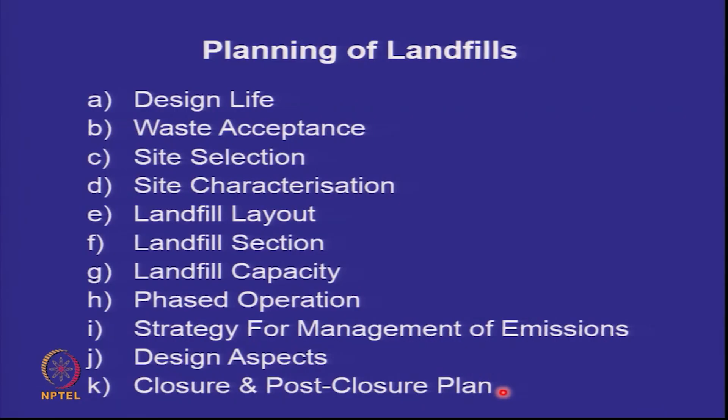what are the design aspects that we have to look into, and what is the closure and post-closure plan. That means when we walk off a landfill, how do we deal with it. Let's quickly recap very briefly what we did last time.

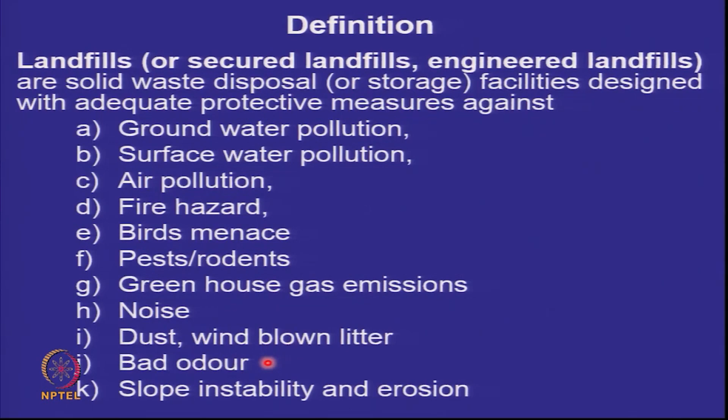We talked about landfills being solid waste disposal facilities designed with adequate protective measures against all this: groundwater pollution, surface water pollution, air pollution, fire, birds' menace, pests, rodents, greenhouse gases, noise, dust, litter, bad odor, slope instability, and erosion.

And we talked about basically three types of landfills adjacent to a city: hazardous waste landfills for industrial waste, non-hazardous waste landfills for municipal solid waste, inert waste landfills for construction and demolition waste. In addition, we said if we have thermal power plants or mine tailings nearby, then we will have monofills for these high volume wastes, and special landfills are designed for highly toxic

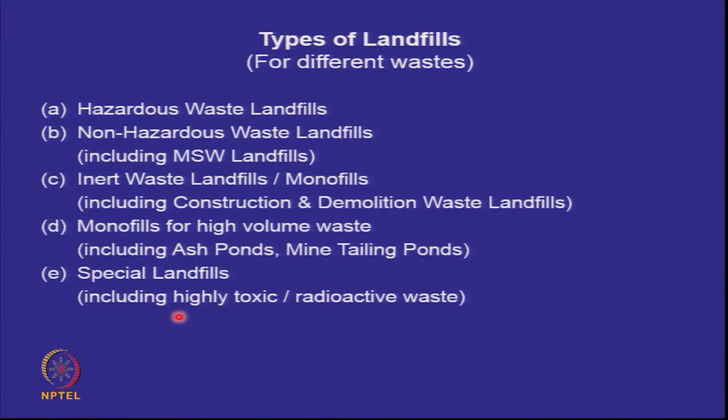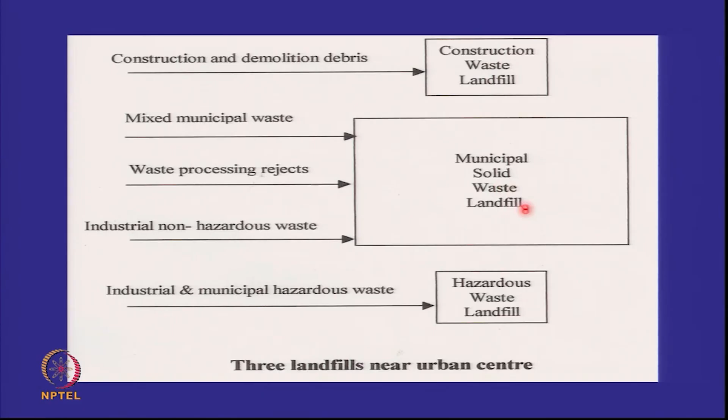and radioactive wastes. We also said that a city could have three separate landfills: one for construction and demolition, one for municipal solid waste, and one for hazardous waste. And we said all of them could be in one location together. That means the largest part would be the mixed municipal waste, but construction waste and hazardous waste could also be in that area.

Now, the advantage of this is if you put them in one place, then the infrastructure facilities required are only one. For example, you will have an entrance and a weighbridge. If these are in three separate locations, for each location you will have to have a weighbridge. For each location you will have to have an environmental monitoring facility. Whereas if all three are together, the infrastructural overheads are much minimized. However, it will depend on the distances involved.

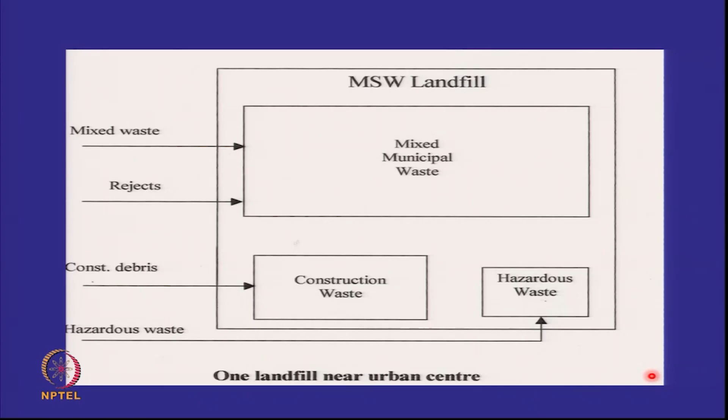If you are a large municipality or a mega city and your transportation costs are very high, then you may not put them in one place, you may put them in three separate places. But I would like you to see what's happening now. So if I look at a huge facility that we create, the mixed municipal solid waste is here, the construction and demolition waste is here, the hazardous waste is here. So these three components is what we saw in the last slide.

But what do we have more at this site? We have a temporary storage. That means if the waste is not going into a landfill, it has to be pre-processed, or if it is monsoon and it cannot be placed, you have a temporary storage facility. You have a pre-processing unit, that is what will go where. Will all the waste go directly here, or will some of it come here after pre-processing?

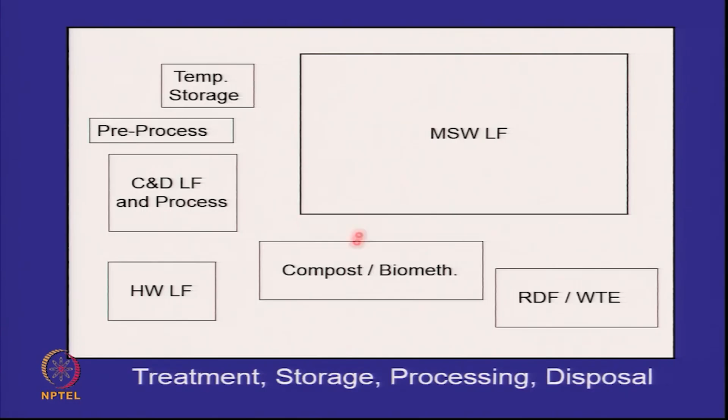And in addition, you may have a composting or a biomethanization plant, and you may have a RDF and a waste to energy plant on the same site. So as the importance of processing and the investments in processing increase, this will become smaller and smaller, because this is now no longer the original municipal solid waste. This is the rejects from everything. It is the rejects from here, the rejects from here, and all that which could not go. So the pre-processing will send some material. So this will become smaller with time, and these will become bigger with time.

So just to recall the landfilling philosophy, which we had done last time, only that waste should be placed which has no recoverable component. Landfills will be designed like dry tombs, no water in, no water out, and not like bioreactors. And the design life will be typically 50 to 75 years, beyond which the containment barriers may have to be re-examined, and we may have to excavate the waste and reconstruct it if the waste is not stable.

If the waste is stable, it can be homogenized with the ecosystem. So if the waste stabilizes, then the waste disposal is final. If the waste does not stabilize in 50 to 75 years, then the waste disposal is temporary storage.

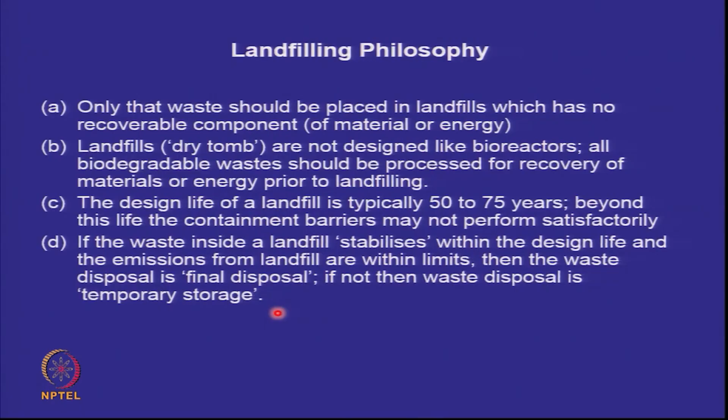So last time we said, is there any other way of doing this, or is this the only way of doing it? So I asked you to read up about bioreactor landfills. So would you like to tell me what you found out? What is the main difference between a dry tomb landfill and a bioreactor landfill?

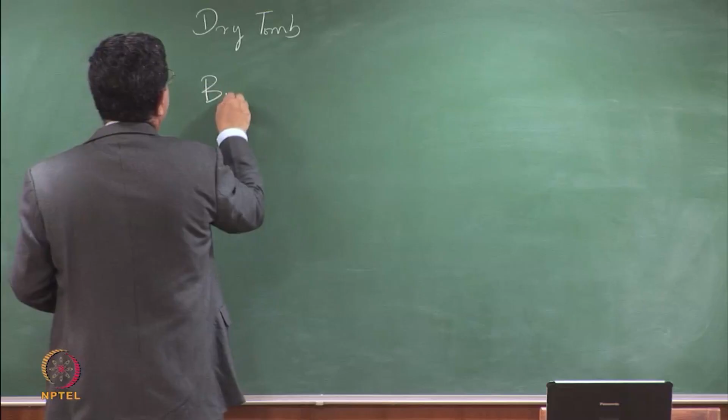So it's being said that in bioreactor landfills you are recirculating the leachate. And is that all? So there are 4 types. Let's put them. So I've talked about dry tomb, and you're talking of bioreactors. Incidentally, I can recirculate the leachate in a dry tomb also. That's just one of the leachate management strategies that you have.

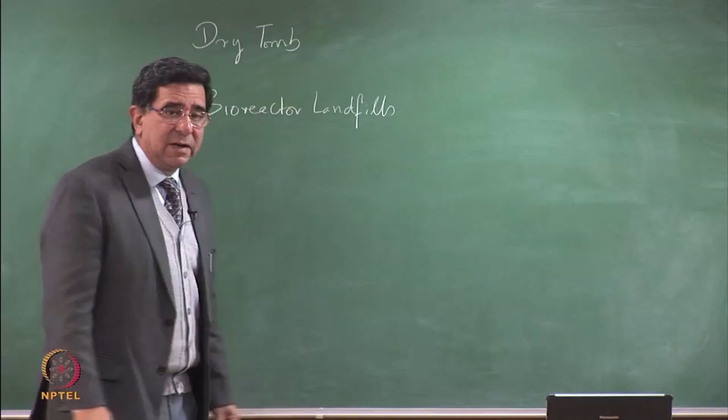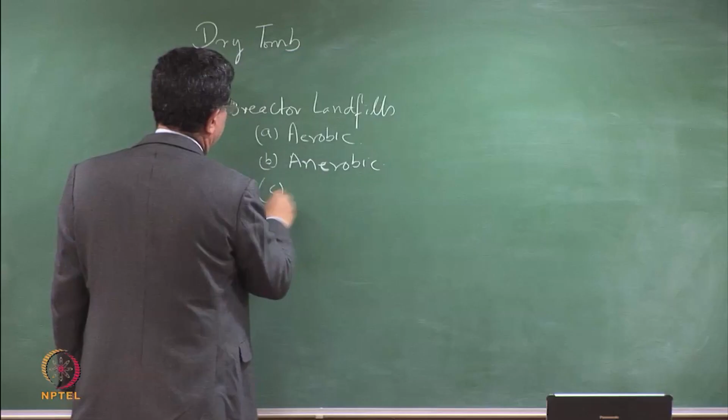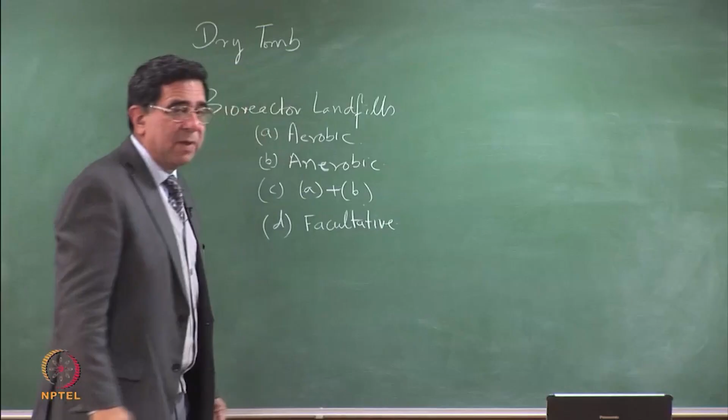So in bioreactor landfills, you said there are 4 types of bioreactor landfills. Okay, just tell me. Aerobic, anaerobic. Both aerobic and anaerobic. Facultative. Pardon? Facultative. So you have to remember that the basic concept of a bioreactor landfill is that the waste which is coming in has got significant biodegradables. What we are saying is that all the biodegradables should go to a composting plant or a biomethanization plant.

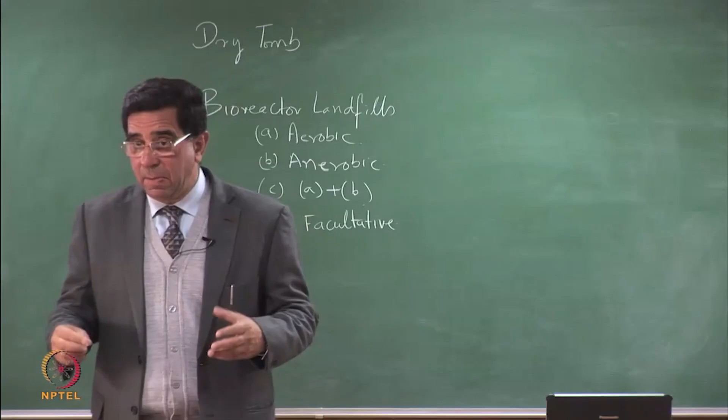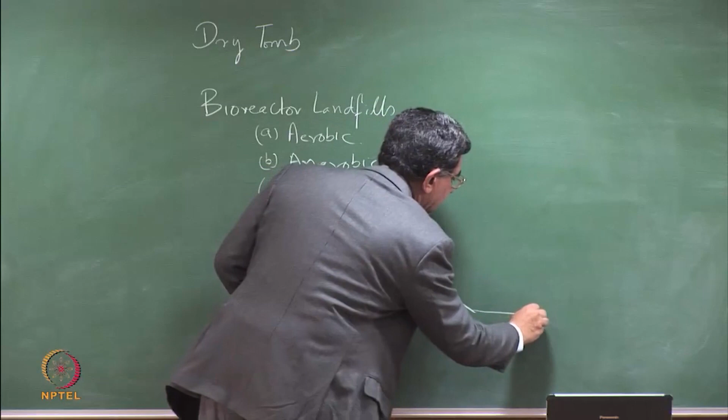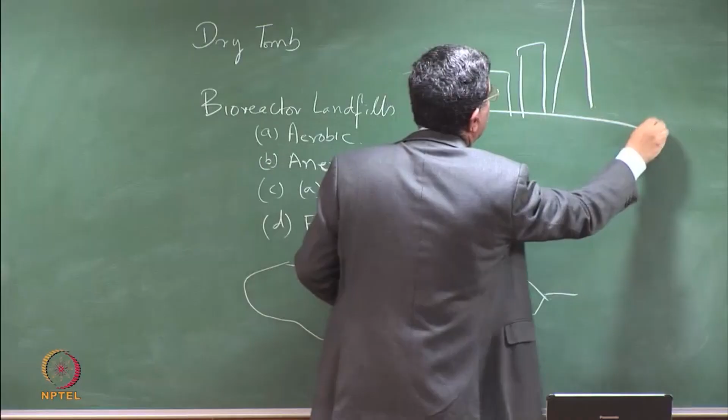So let us compare. This is a bioreactor landfill, right? Which, let us say, looks something like that. And this is a factory or a closed industrial building where the waste comes in for other purposes like biomethanization. So the bioreactor landfill is an open area bioreactor. Whereas if you do containerized biomethanization or containerized composting, anaerobic or aerobic, then you have everything in a controlled environment. So there are 2 differences, controlled and uncontrolled, right?

And I talked to you about composting last time. Windrow composting is aerobic. In how much time does the waste stabilize? Do you remember that I had said that you can make these long windrows, you can turn them over every day. Well, I said in weeks, the waste will stabilize in weeks, right? And remember, windrow composting is also open, and so they should put it under a shed. It's not containerized composting. So containerized composting is more expensive. Windrow composting is less expensive but gives more odor. But in any case, we are talking here of stabilization of the waste in weeks.

Suppose some biodegradable waste comes into a conventional dry tomb landfill. How much time do you think it stabilizes in? Weeks, months, years, tens of years. Well, tens of years. I can assure you that in a dry tomb landfill in which water is not coming in, you don't have enough moisture to degrade. So in a dry tomb landfill, the waste stabilizes in tens of years. Therefore, biodegradables should not come in. Well, if you make a bioreactor landfill, in how much time does it stabilize? Yeah, so it goes from tens of years to years. It doesn't go from tens of years to weeks. So I'm just giving you 2-3 alternative comparisons.

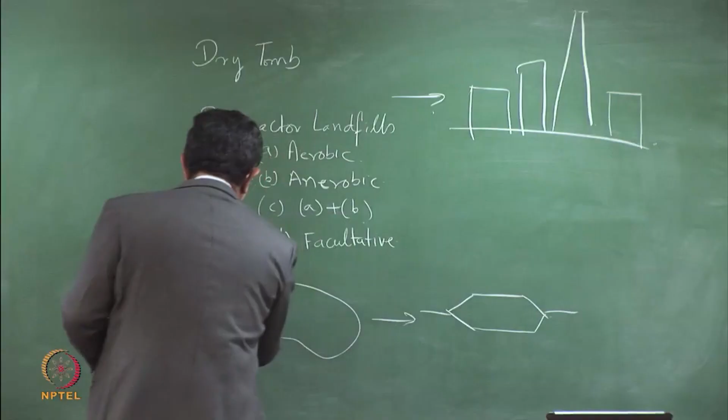One, in a closed container facility like this, the waste coming in, we have more control. We have control over temperature, humidity, pH, and oxygen. In a facility like this, we can attempt to do control, but it's not that closely possible. There is rainfall, it's in kind of an open air facility. Therefore, the dry tomb philosophy presupposes that everything will go to dedicated facilities which are geared for stabilizing the waste in a particular way. Whereas the bioreactor landfill is just a faster way of stabilizing the biodegradables in a dry tomb landfill.

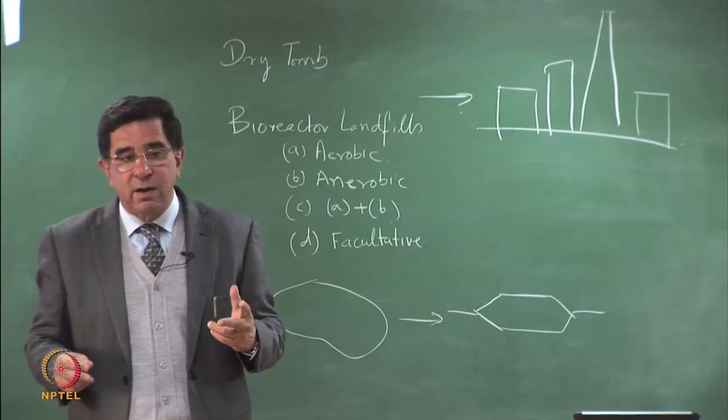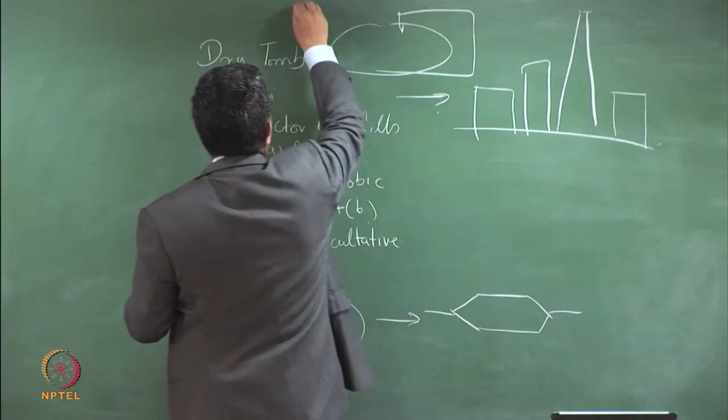So I can recirculate the leachate or I can send in air. So the two variables which you are really controlling are sending in water and sending in air. So if I have a dry tomb landfill and I take out the leachate and recirculate it, or get fresh water and recirculate it, and if I get air and recirculate it, then it becomes like a bioreactor landfill. However, control is difficult. Sometimes people have tried to accelerate these processes by putting in some accelerators, and the process can go out of control. You may have a lot of heat, you may not be able to control all the conditions. You can control humidity in a container, but you may not be able to control humidity in a landfill.

So bioreactor landfills are good when the waste is so intimately mixed that the biodegradables cannot be easily separated from the other components. Then you might want to send this to a bioreactor landfill. However, if you are doing separate storage at source, or even if not, but you can do pre-sorting, send bulk of the material to a composting plant or a biomethanization plant or a gasification plant, because they are more dedicated and they stabilize the waste faster.

So that's the concept. In some countries bioreactor landfills have come up, but not in a very big way. We still try to use them as an accelerated, stabilized landfill. But remember, you are dealing with much larger quantities of leachate, and there are associated risks - larger possibilities of leakage and instability of slopes if the pore water pressure inside the waste goes up. So these have to be traded one off the other. At the moment, India is following the dry tomb philosophy, but it is open to new developments from time to time.

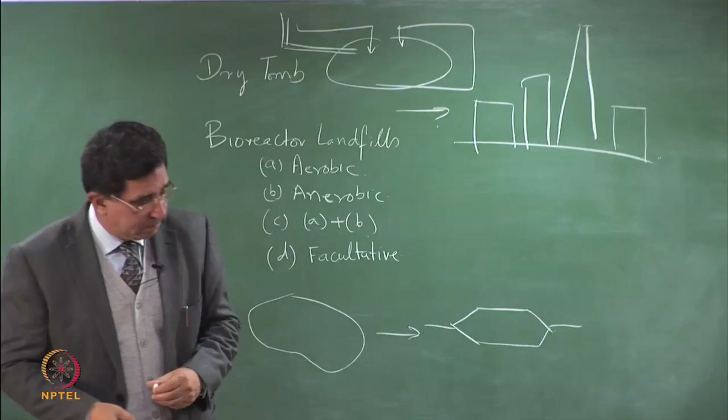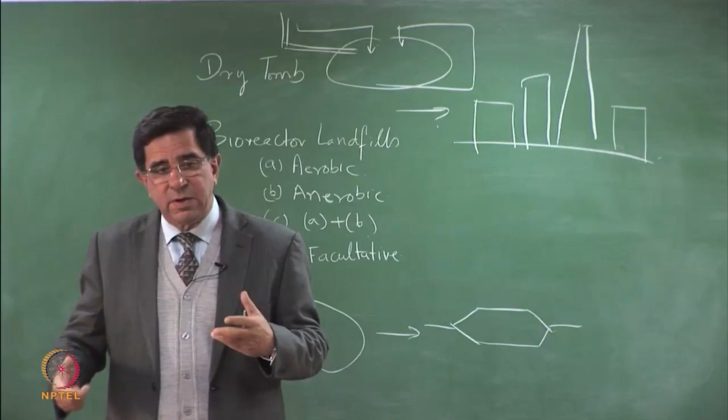Any question you would have on this? Since you studied bioreactor landfills, if you feel it's still better, you've got to weigh the various alternatives that we have.

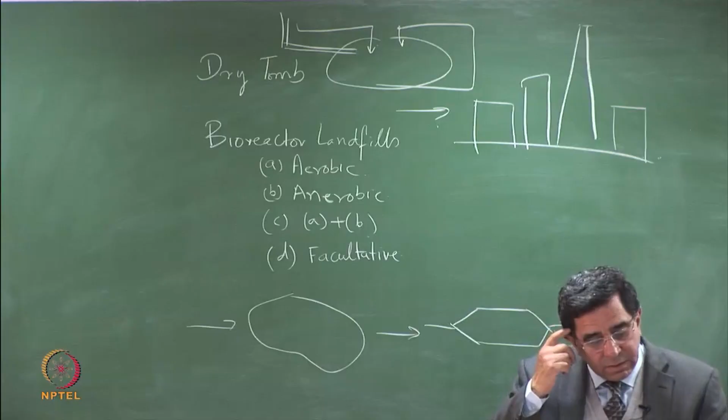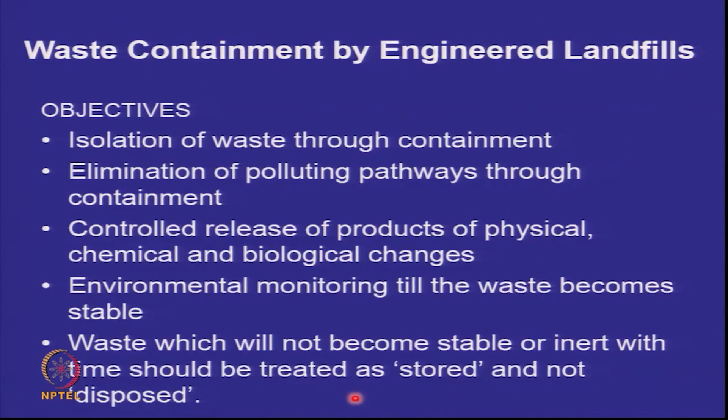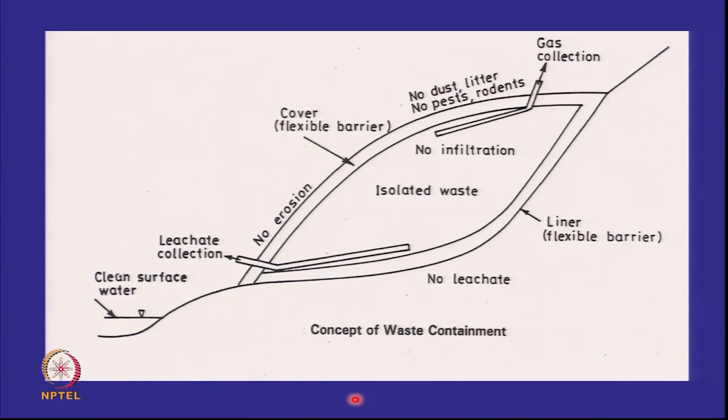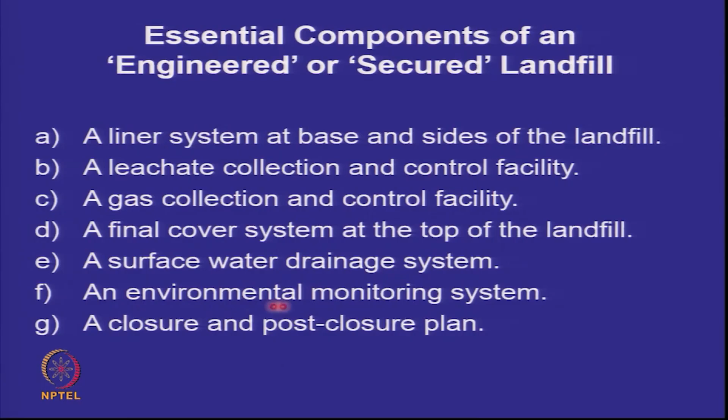And we said that if you have these 7 components - a liner system, a leachate collection system, a gas collection system, a final cover, a surface water drainage system, an environmental monitoring system, and a closure and post-closure plan - you have an engineered, secured, or scientific landfill.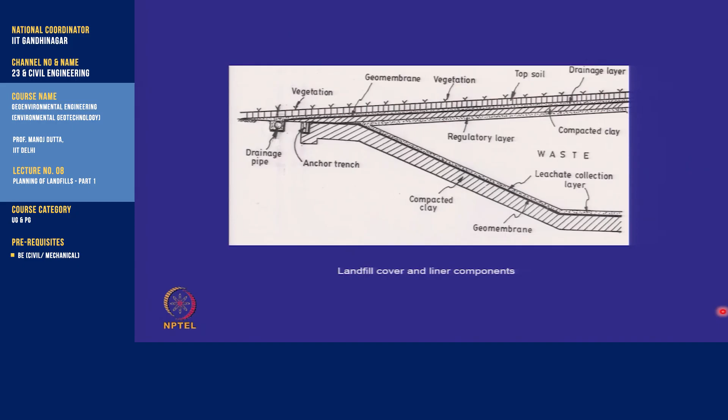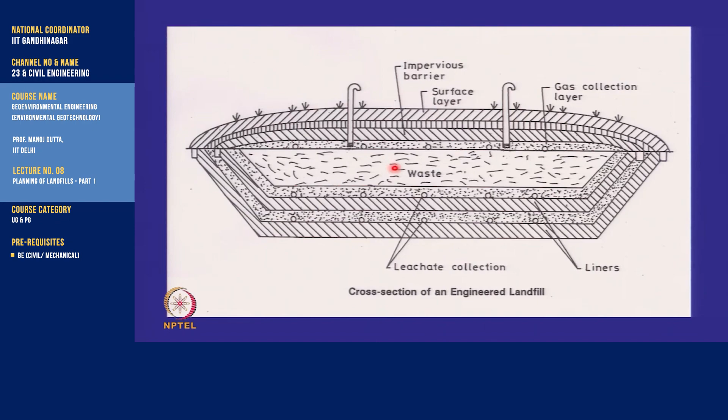And this is what it looks like in its true component form. If you look at an exaggerated view of the cover and the liner here - of course this waste is actually several meters or tens of meters high, and these are only a meter or two, but this is an exaggerated view to show it has many components. The covers and the liner are multi-component systems.

So the first question is, what is the design life of a landfill? Just to address this issue, the design life of a building is 75 to 100 years. So the larger I make the design life of a landfill, the more area I need. If you want a 100-year landfill, you have to calculate the waste that will come out, what percentage of the waste will reach the landfill, and you'll come up with a huge area. So typically, a landfill can be designed for the same design life as a building.

However, often that much area will not be available. If that much area is not available, what is the correct idea of the size of a landfill? The design life of a landfill is the active period when the waste is being filled, plus the closure and post-closure period. After you have filled the waste and are no longer putting waste on the site, the site is not closed, because the whole thing is still undergoing chemical reactions. So you have two periods - the filling period and the closure and post-closure period - for which you have to take very intense care of the site.

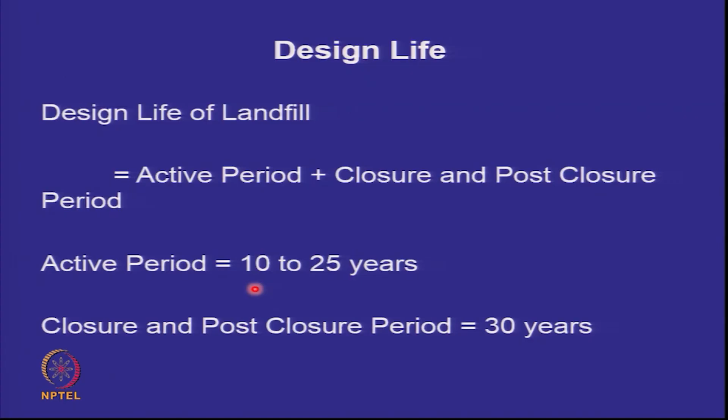Now, can the active period be smaller? You might say, I've got a very small piece of land, can I design a landfill for 3 years? Well, sure, you can design it, but it's very expensive. The smaller a landfill becomes, all the facilities have to remain the same - you still have to have an entrance gate, a weighbridge for the waste coming in, fencing, monitoring wells and air monitors. So all those expenditures are fixed. You might say I'll go off the site in 3 years, but you still have to monitor that site, if doing an engineering design, for the full time till the waste becomes stable. So typically, a site with less than 10 years active period is uneconomical or unviable. It's better to have sites with an active period of 10 to 25 years.

Remember, depending on the type of landfill, you will have acceptance criteria. You can't go and dump any waste on any landfill. Only authorized waste will be accepted, and no liquid waste or slurry type waste will be accepted at a landfill. You can have thick viscous sludge which will not move on its own. Slurry type waste means lean slurry, that means a lot of water. If you have a slurry type waste which is a lot of water, you have to dewater it and bring it to a form where it will not move. So authorized waste only, no liquid or slurry type waste can come into landfills.

Landfills are not designed like ponds. No recyclable and no compostable waste should come to the landfill. Only that which is so intimately mixed that none of the plants are going to accept it should come. No waste from which energy or material recovery is feasible through thermal, biological, or any other process should come to the landfill.

If you are having hazardous waste landfills, you get waste from different industries, and fires and explosions at hazardous waste landfills are not unheard of. So if you have incompatible waste, one which will ignite the other or cause a reaction, then you have to store them separately in separate landfill units.

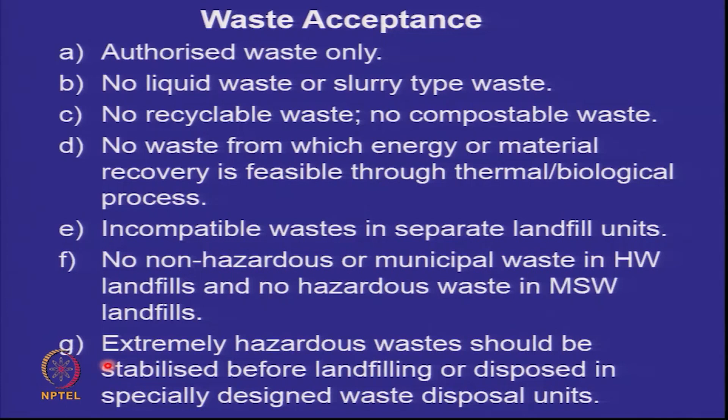There are two ways to handle this. One is that you can stabilize it and then landfill it, or you have to go for a specially designed waste disposal facility. Suppose I have a hazardous waste X. How do I stabilize it? I can encapsulate it, I can put it in a lead container - I am just giving you examples. And then this encapsulated waste can be placed in a landfill which permits it.

However, if it is nuclear waste, you can't even do that. If you have very hazardous waste, then all countries are expected to have a very hazardous waste disposal site which is deep underground in the rock, and that's where the waste should go. So it's like one country may have one or two such sites, whereas for municipal solid waste landfill, every municipality will have to have one. Hazardous waste landfill, not every municipality.

Those which are big industrial areas will have hazardous waste landfills, and they will in fact receive the hazardous waste from the areas around it. It becomes like a regional landfill. So typically a state may have 2, 3 or more hazardous waste sites. Gujarat is very industrialized, it has many hazardous waste landfills, whereas Punjab and Haryana may have only 1 or 2, but all big towns will have a municipal solid waste landfill.

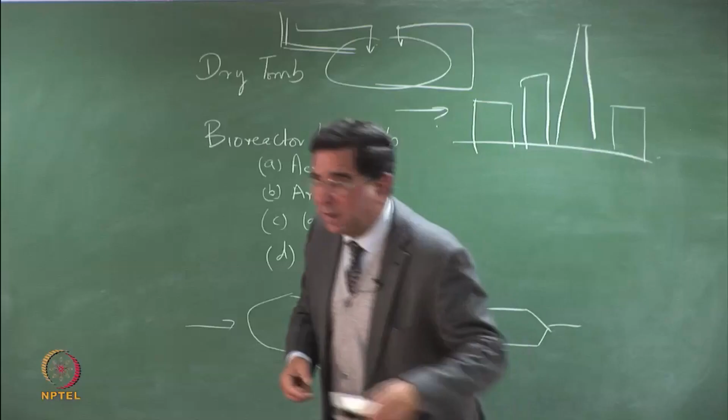We have to select a site with greatest protection to the environment at low cost and with public acceptance. The most difficult problem is with public acceptance. Nobody wants to have waste in their backyard. And what is that called? NIMBY - not in my backyard. You can send the waste anywhere else, but don't send the waste to my backyard.

So the biggest thing we have to overcome, and everybody is now very enlightened, is NIMBY. The villagers are enlightened. They say don't send the waste of the city to our village or near our village. Why should you? You live in your own waste, you are generating the waste. So typically this is a big problem now in the country.

However, the solution to this is always either barren land or already degraded land. That means land where waste has been traditionally disposed of in the past, maybe not in a proper manner. But once waste is already being disposed there, and you tell people, no, now we are going to do it in a more engineered manner, it will look green after, and you show them other landfills, then they say, oh, this is good.

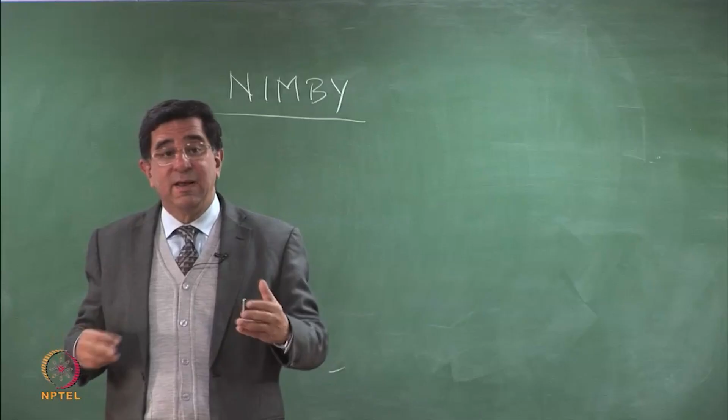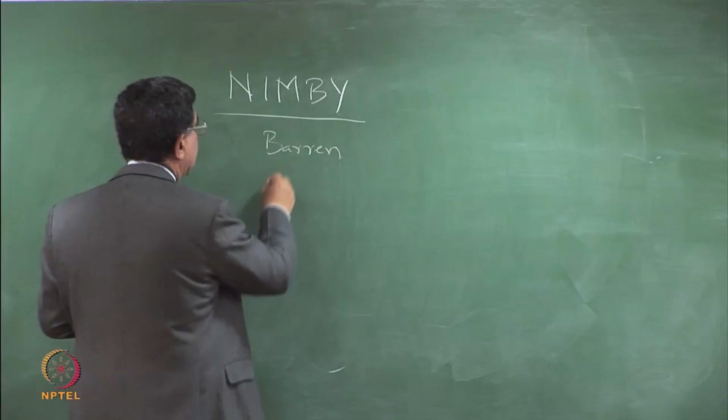But if you go to a new site, a greenfield site, then you have a problem. So typically, when doing site selection, look for barren land, away from habitation, and look for degraded land. The simplest or the highest priority is land which has already been used in the past for dumping all kinds of industrial waste or municipal waste.

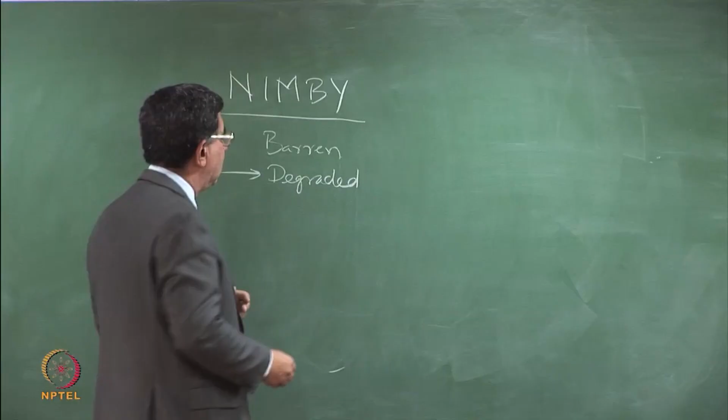So suppose you have a bunch of sites, say 2 or 3, then also you have to still come up with the best site. For that you have to do a site selection methodology where you have to balance multiple parameters. We are talking of protection of environment, low cost, and we have to consider some attributes which you can see we are talking about.

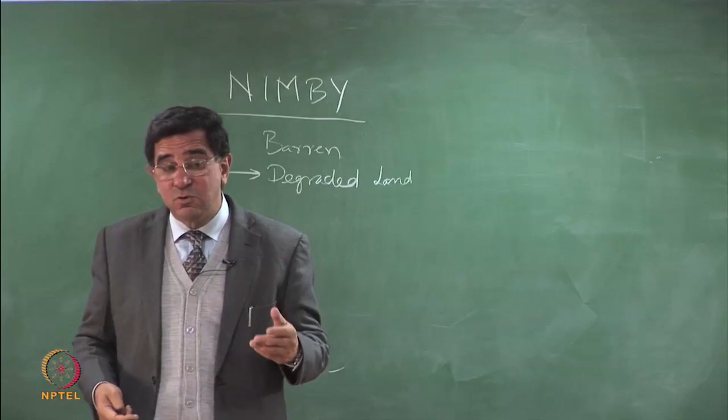Let us say I have 2 sites. In one place the groundwater table is 2 meters below the soil, in another place the groundwater table is 20 meters below the soil. So the immediate bell which rings is that the 2 meter site, where the groundwater table is 2 meters below the ground, should be avoided, because if there is any leakage, groundwater will become immediately contaminated. And if it's 2 or 3 meters and it's drinking water, there will already be hand pumps in that area, so people will be using it all the time.

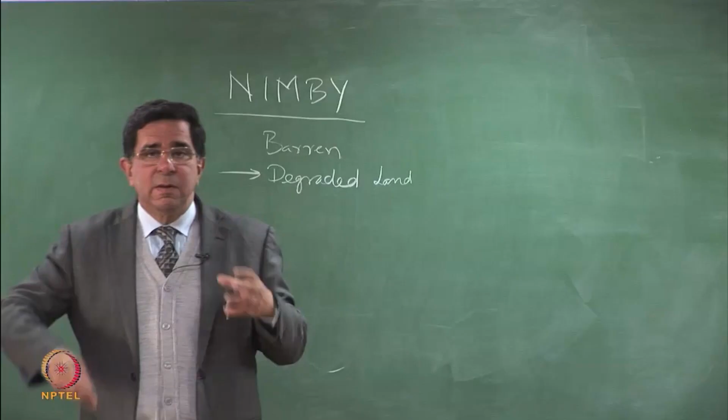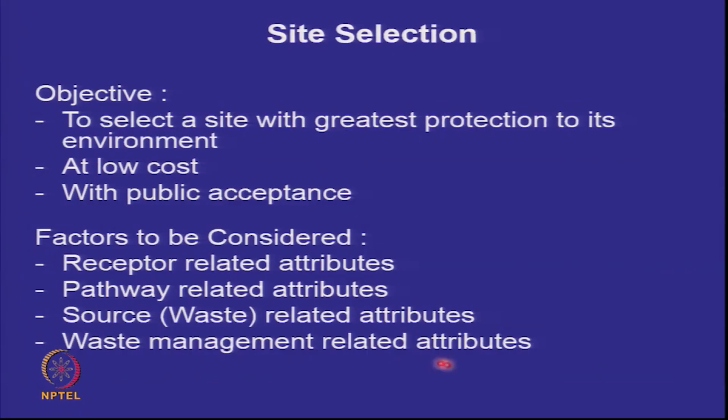So such parameters - receptor related parameters, how many people are adjacent to that site; pathway related parameters, where is the groundwater table, where are the drinking wells, where is the river; source related parameters, are you having a large waste dump or a small waste dump; and waste management attributes - these are the 4 sets of attributes which have to be considered. Decision making is not simple. It has to be a multi-parameter approach, so potential sites are identified and site selection criteria is drawn up.

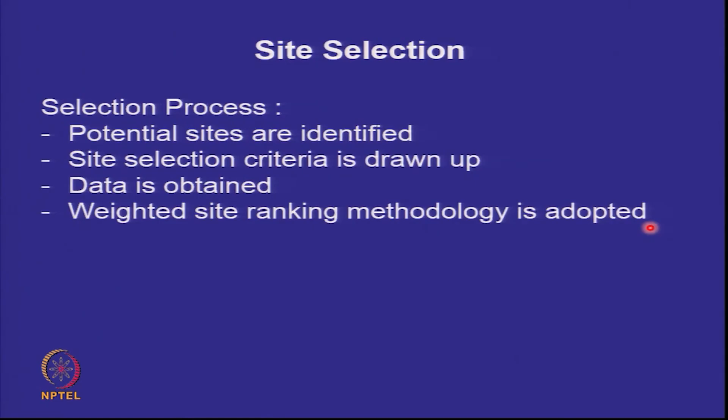A weighted site ranking methodology is adopted. The Central Pollution Control Board has one weighted site ranking methodology. There are more site ranking methodologies available in literature. We will do the weighted site ranking methodology in a later lecture. So we identify the sites. If there is only one site available, the choice is hardly there.

You have to set up criteria - what is important to you and the people - and obtain the data. You can't make decisions in the absence of data. What is the type of soil? Is it pervious sand or is it impervious clay? So some decisions are fairly obvious, and then you adopt this.

But for us, broad locational criteria is already there as to the minimum distances from critical facilities. So when you have a landfill which has to be located at a site, you will check all these. It should be at least 200 meters away from a lake or a pond, more than 100 meters away from a river. If it's in a floodplain, that means that area gets flooded, then you have to make a protective embankment all around it, because you can't have your landfill being submerged and unsubmerged - the whole thing getting filled with water while it's operating.

You have to be 500 meters away from a highway, 500 meters away from a residential colony, 500 meters away from a public park. You cannot be inside a critical habitat, inside a wetland, or inside the coastal regulation zone. Because of bird hits, you should be 3 to 20 kilometers away from an airport. I think the Indian regulations are much more stringent - they are talking of being 20 kilometers away. You should be 500 meters away from the nearest water supply tube well. The groundwater table level should be at least 2 meters below the base, and other factors.

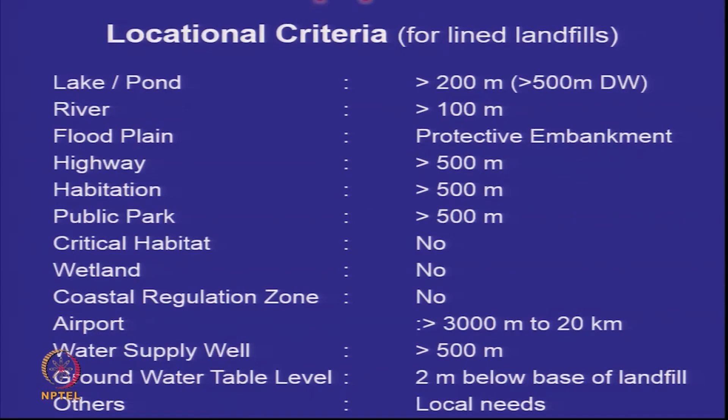So in all this, what you are saying is these are the safe distances, minimum acceptable guidelines. Please see, I have put 500 meters from my perspective. While rivers get flushed every year during high flows, during the monsoons the rivers have high flows, contaminants tend to get washed out. But lakes and ponds, especially if the lake is being used for drinking water purposes, don't get cleaned up that often. So it's best to keep them 500 meters away if you are using those lakes and ponds for drinking water supply. So you adopt this locational criteria, and after that, if you have a bunch of sites, you have to do a weighted site ranking methodology.

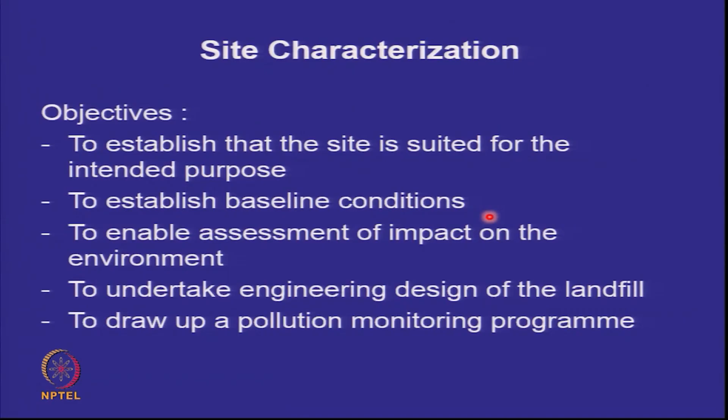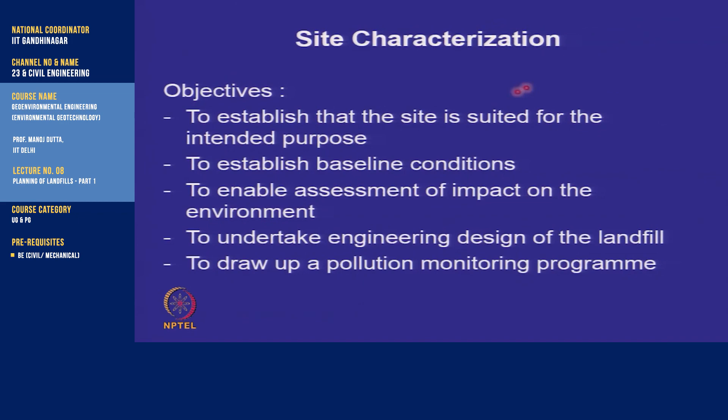Having identified some sites, you have to do site characterization, and you need a lot of data. You have to establish that the site is suitable, and establish the baseline conditions, because you are always going to do monitoring. What was it before and what did it become after? You have to do an Environmental Impact Assessment Report for getting clearance. To do the design, we need the site characterization, and to do the monitoring program, we also need it. So this is an important step for us.

It's not simple. You have to have the following information: surface landform topography, drainage and surface water quality, subsoil properties, depth to bedrock, depth to water table, fluctuations in water table, direction of groundwater flow and its quality, current land use pattern with any history of mining or quarrying, any underground openings, availability of topsoil, clay and other materials to be used for the landfill, background levels of gas, noise, dust, etc., which you are going to later monitor, and the meteorological conditions: rainfall, wind, evapotranspiration and seismicity.

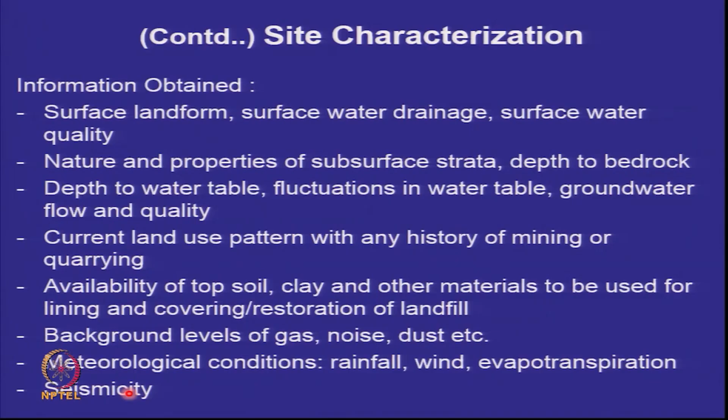So this is the bunch of data that you need for a good landfill design. And with this, once you have characterized it, landfill design is easy.

So if I look at the first thing, what does a landfill look like in plan? Fundamentally, a landfill comprises 80% of the area which is going to be used for placing the waste, and 20% of the area which is going to be used for other facilities. So whatever area you have, 80% is likely to be used for placement of waste and 20% for others. Now this is only when you are placing the waste in that area.

If you are going to make a composting plant in that area, or a waste-to-energy or RDF plant, then they will take up much larger space, and the area used for storage of the waste will decrease with time. In any case, you will have offices, laboratory, workshops, treatment facilities, fencing, green belt, roads, temporary areas for holding the material, and environmental monitoring facilities.

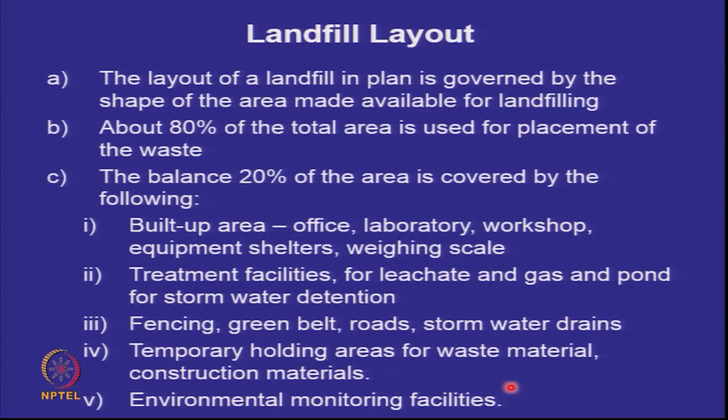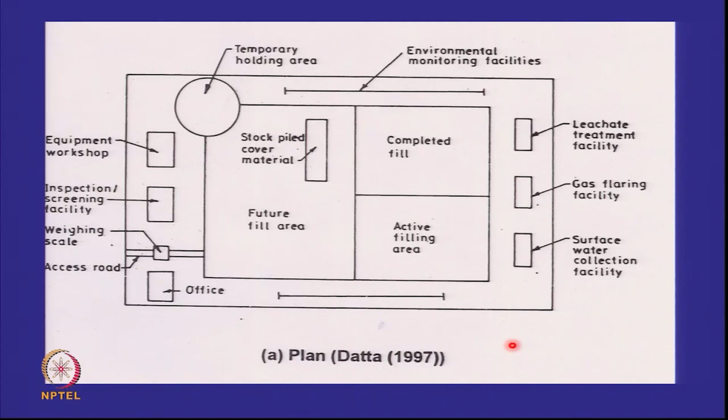When you collect the leachate, it goes to a leachate treatment plant. When you collect the gas, it goes to a gas flaring unit. When you collect the surface water, it goes to a surface water collection unit. And then you will have environmental monitoring facilities. So this is a nice kind of diagram which tells you what it looks like.

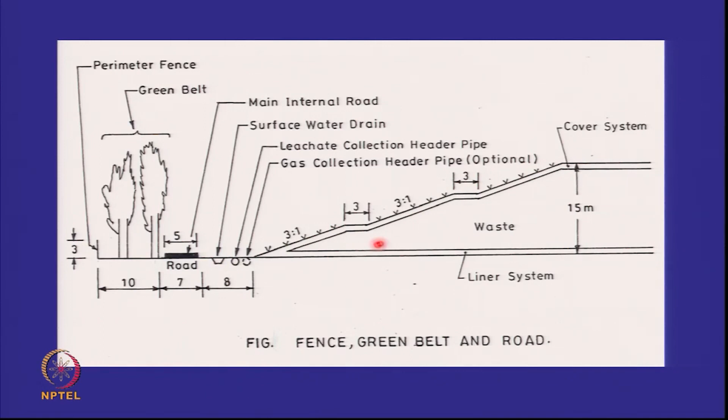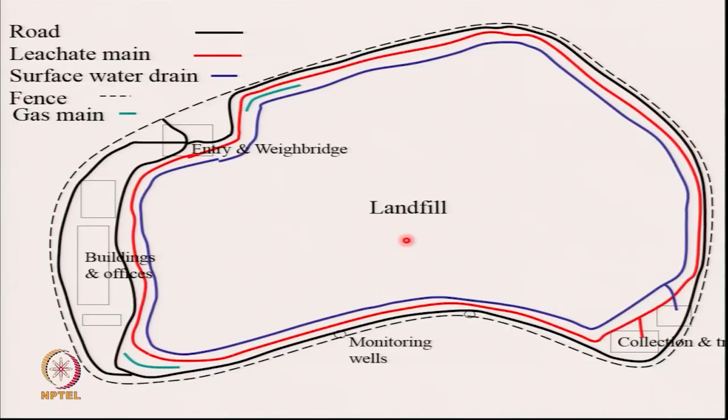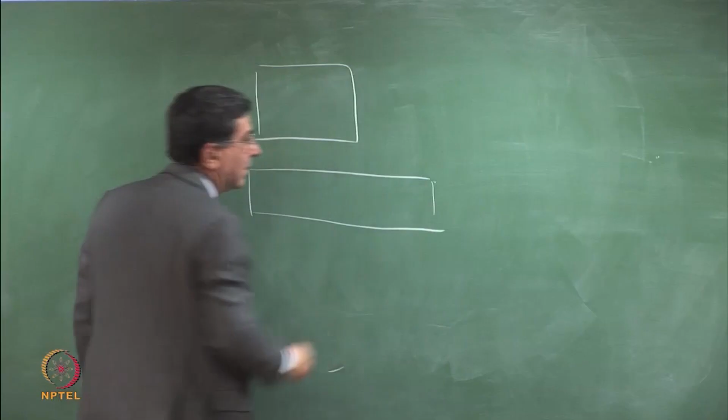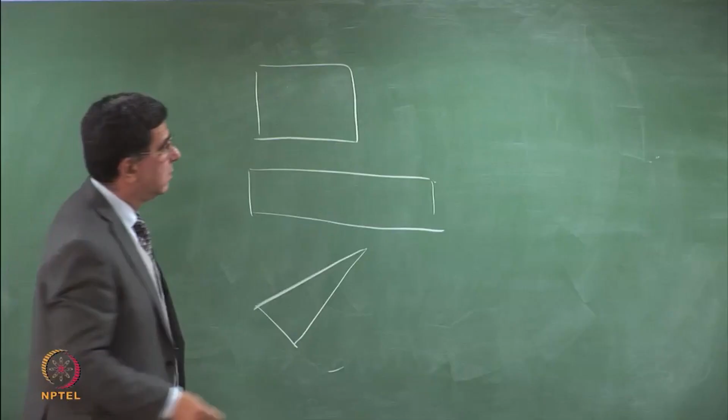So you will get land not the way you want it, but as it exists. You can have a shape like this. At one place they are giving land like this, adjacent to a railway track. In Faridabad we got land like this. In Dahej, in Gujarat, we have land which looks like this. All this is counted towards your landfill.

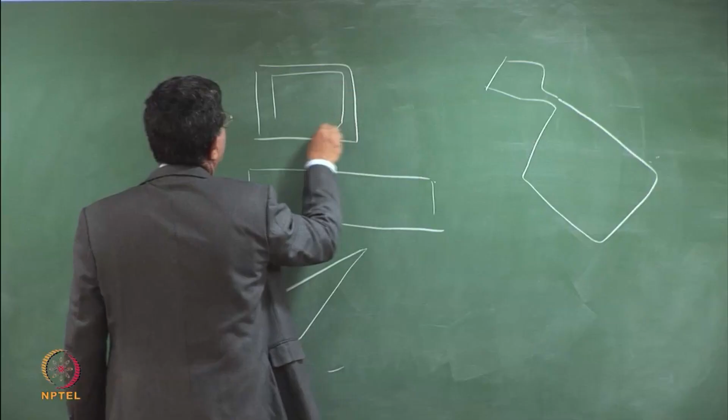So you will get the land as it is available, not as you desire, because you are trying to find out a land which is acceptable to the people around. So with all this, you have to then design your facilities. But remember, the thumb rule is that typically 80% of the area will be used for placing the waste.

What is the problem with these very narrow areas? Area looks great. I can give this as a very narrow strip. But what's the problem with a narrow strip? Well, if you have a wide base, then your landfill goes up and looks like this. Now you make the base very narrow and make it very long. What happens? The slopes come and hit each other and you can't get to a higher height. So if you want to make high landfills, you need a larger base width of the shorter dimension.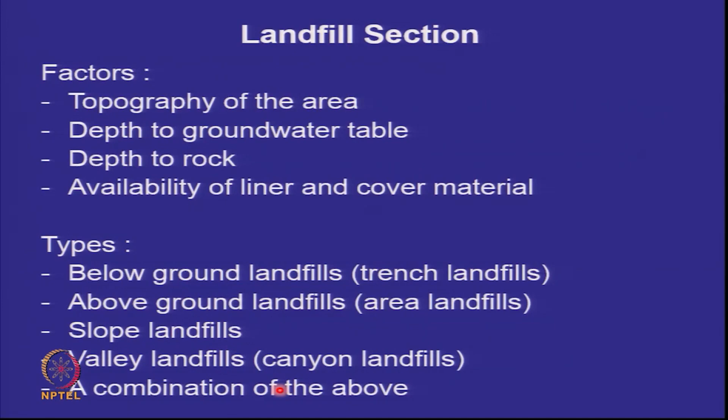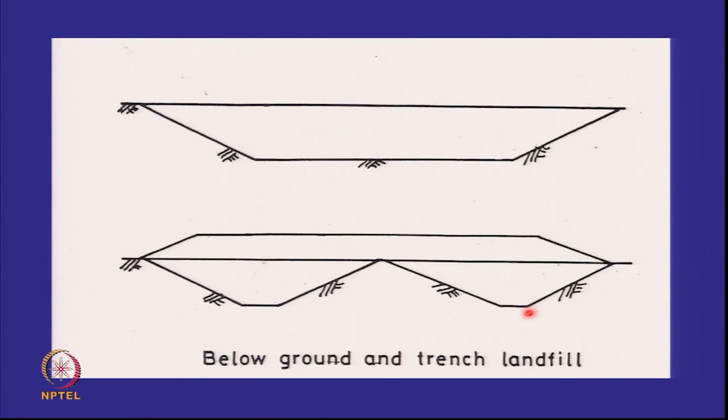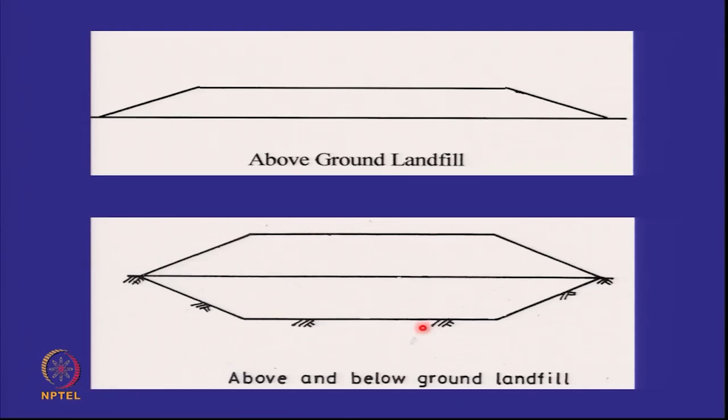That's a below ground landfill, and this is also nowadays used very little. This is called a trench landfill, and it has a part of an above ground landfill on it. These trench landfills are not used because you are losing the space. So now all of them will become like this. So I have an above ground landfill. When will I have an above ground landfill? When I want to do everything by gravity, my leachate should come out by gravity, or when the rock is near the surface, or when the groundwater table is very close. And the other option is to do an above and below ground landfill together.

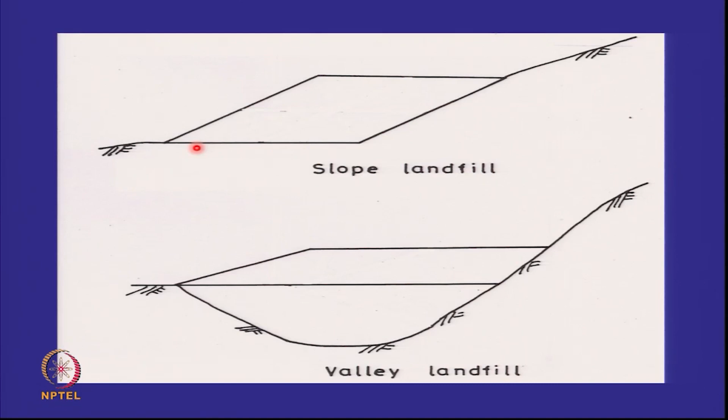Yet another option is to do it on the sides of hills. This is a side slope landfill. If your topography is sloping and you are in a hilly region, you can't go and adopt these. If you are in a valley or flat ground, you can adopt these. But if you are on sloping ground, then you have to adopt this. This is a side slope landfill, and this is a valley landfill.

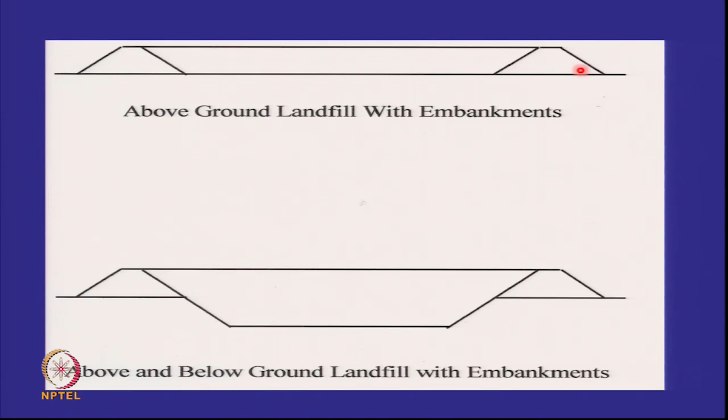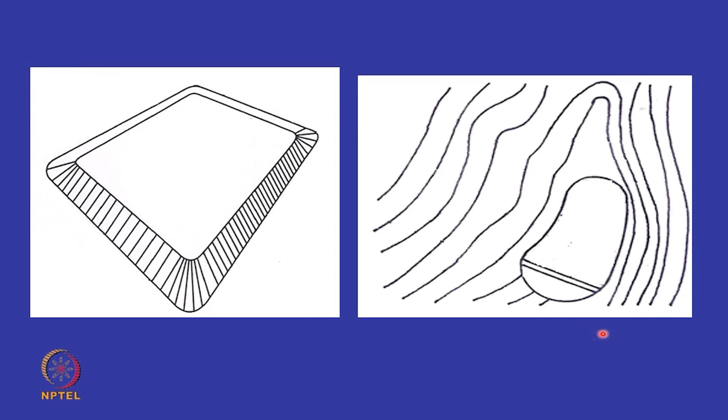The landfills will look like the area which you get. This is something on flat ground, so you have an above ground landfill, maybe above and below. This is what you can see from the top. And when I talk of a valley landfill in a hilly region, this looks very much like a dam across two mountains to store water behind it and create a reservoir. But this is actually filled with solid waste, so you can create a valley landfill in the area. So depending on the situation, we will have different sections: above, below, and other types.

So I have shown you in the last few minutes what landfills look like when you look at them from the top, and what they look like when you slice them open. You've seen the sections, they can be very variable. And we said topography, depth to groundwater table, and depth to bedrock. If both are high, you're going to be above the ground. If you have sloping ground, you can only make a sloping or a valley type of landfill. And the planar view depends on what area you get. You can't decide what type of area you want.

So we'll stop here today. You can digest all this information, and we will continue to look at the inside. I have this area, I have this section. What does it look like from inside? And what are the various components of design?